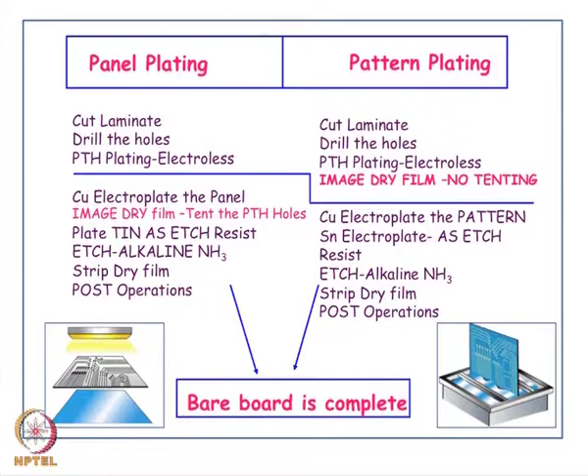There is a dielectric material, and then you have copper at the top and at the bottom. Now we are drilling a mechanical hole. These holes are meant for providing interconnects, electrical contact between the top copper and the bottom copper. When you drill a hole, the inside of the hole wall is dielectric material - it is non-conductive. So you have to make it conductive.

So the plated through hole process sequence will let you know how a conductive hole wall is established using a combination of electroless copper and electroplating copper. So we look at the sequence once again, and this is highlighted through videos.

Now if you look at the first step, as we discussed last time, it is the image transfer process. I let you watch the image transfer, because this is going to be a very important step, whether we are going to do pattern plating or panel plating for a double sided printed wiring board. You can see here the board has been laminated with the dry film photoresist material.

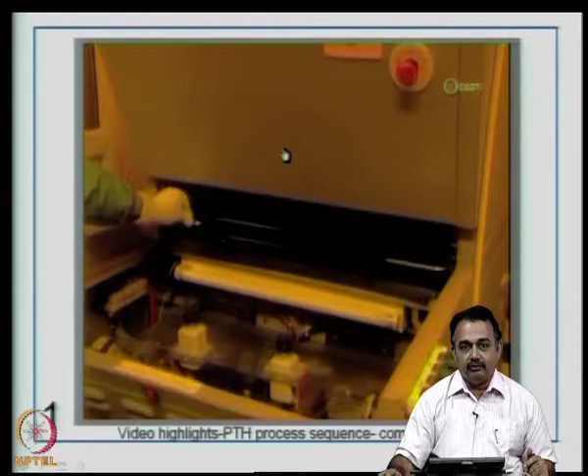Now remember all the properties that are required to be established before a dry film operation. The suitable masks for imaging the electrical layers are subsequently taken. They are aligned with the through holes that you have drilled, and then introduced into the UV exposure unit. You can see this is a UV exposure unit, where sufficient UV light is exposed to the dry film through the mask. Now this will help establish an image.

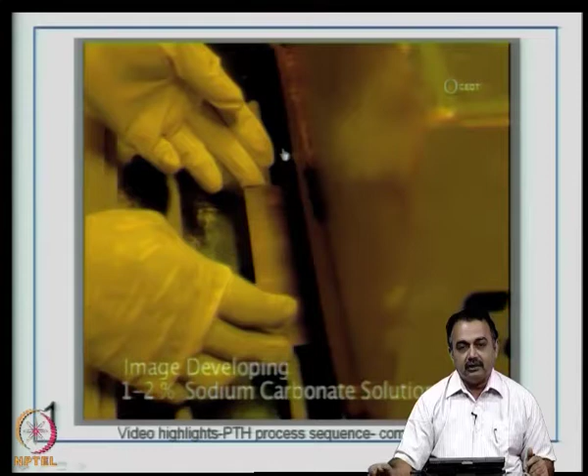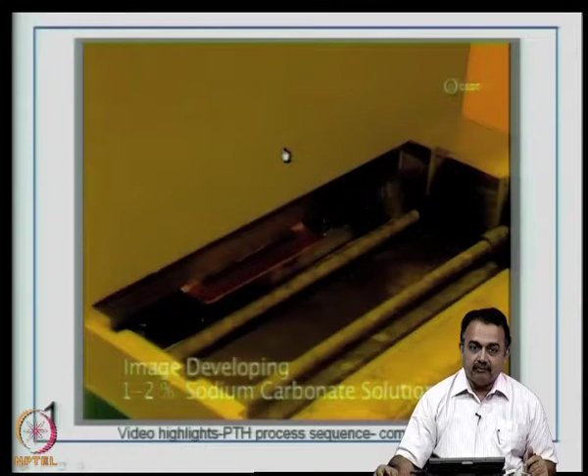Now this image is further stabilized by the developing process. So the resist will be removed in the unwanted areas, and the resist will remain on the substrate where the circuit is to be protected, or in some cases where the circuit pattern requires additional copper to be added in terms of increasing the thickness of copper on the circuit areas.

Now this is the first step, that is the image transfer. Now we get into the second step of the plated through hole sequence, which is called electroless copper plating. So once again I emphasize, we are not using an external DC current here. We are using a chemical reduction process from a copper rich solution and using some reducing agents to deposit copper onto the surface of the board as well as the through holes.

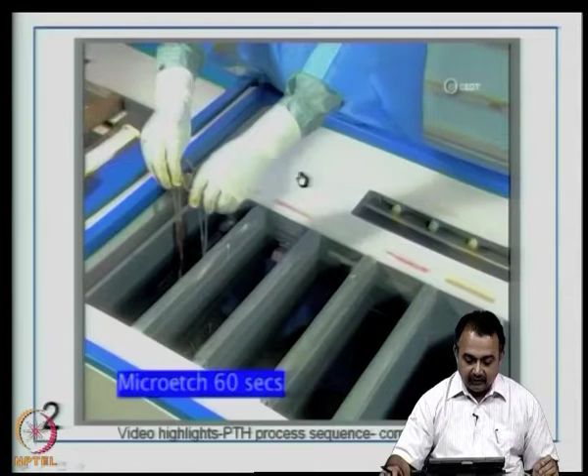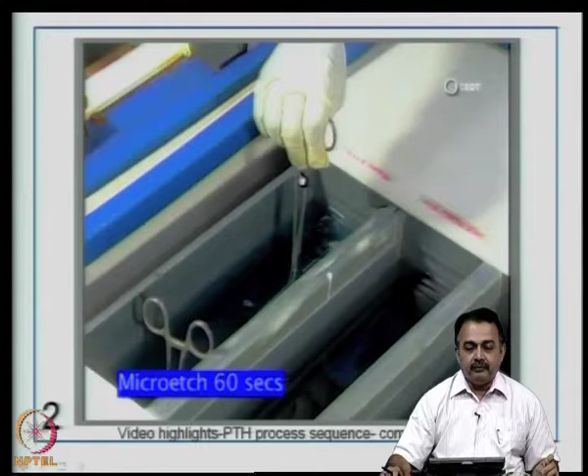Now before that, if you look at the video, what we are basically doing is a micro etch. This will remove some amount of copper from the surface of the board to the extent of about 1 to 2 microns. This will provide more roughness, more surface area for the imaging process to happen in a good manner.

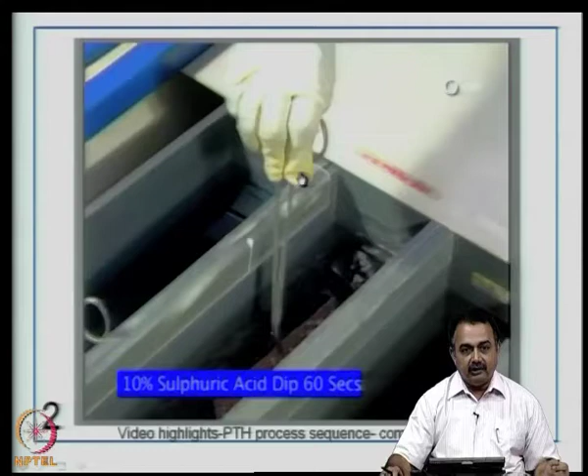Then the next step after the micro etch is a water rinse. Typically, you can use a cascade rinse or a spray rinse in some cases, as you have seen here, for 30 seconds. Then it undergoes an acid treatment in a 10% sulfuric acid dip to activate the surface with the acid. Then it is neutralized with water.

So these are all the cleaning processes. What you are seeing is basically a micro etch as a cleaning process, the sulfuric acid is a cleaning process to remove oxides and other debris that may be on the surface.

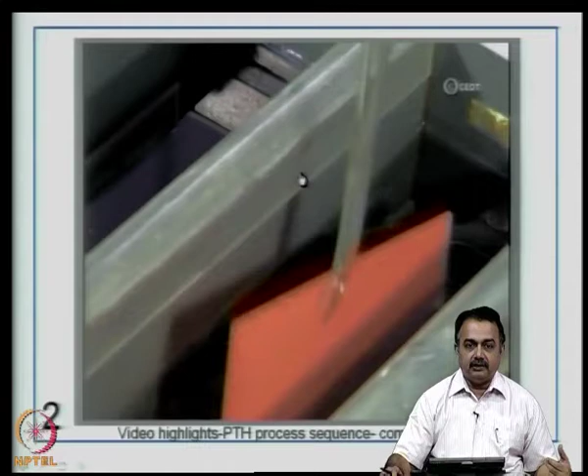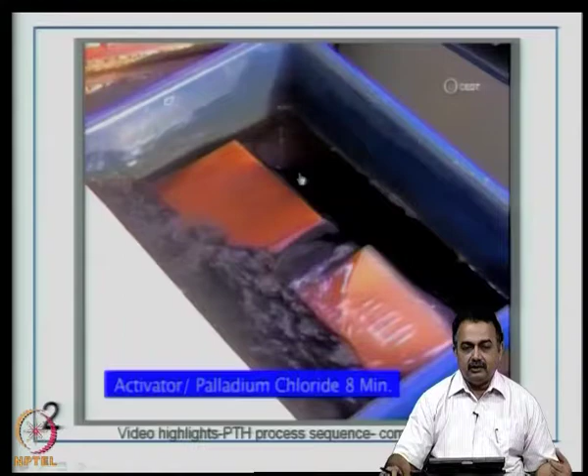Now we are introducing into a pre-dip. Remember, the next step is going to be a catalyst activator, which is chloride based. So we now wet the board with a chloride, hydrochloric acid. Now it is introduced into a tray containing palladium chloride, which is our catalyst.

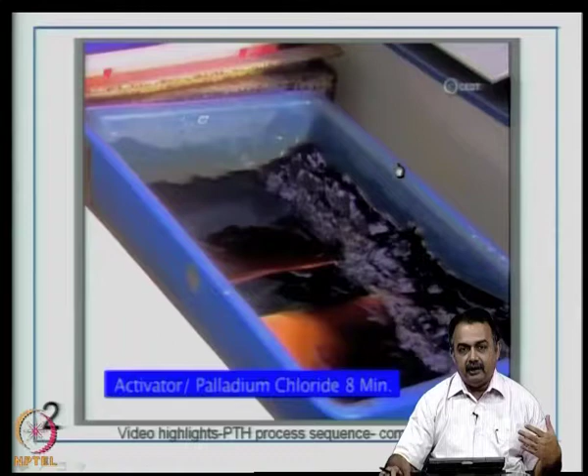You remember the equation that I put up in the last class, where we described how the palladium is adsorbed on the surface of the copper, and then to the surface of palladium your copper gets attached. It is a strong physical bond, and this again is very key to the reliability of the entire board.

Now after the recommended time in the catalyst, the board is washed well, water rinsed for about 30 seconds. Remember, the water we use here is deionized water, which is free from all contamination like chlorides, carbonates and so on.

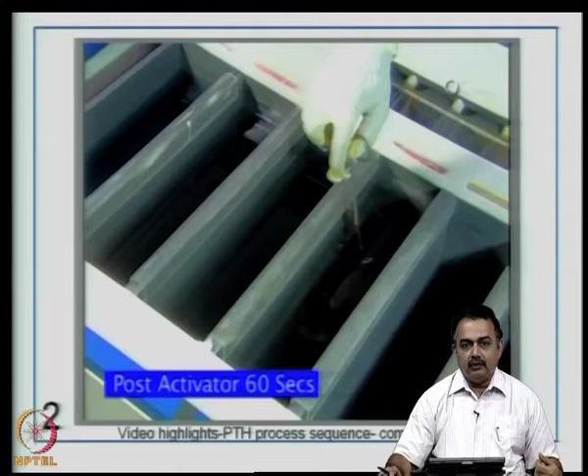It could be an 8-layer multi-layer board or a 16-layer multi-layer board. They have to undergo these critical process steps.

Now comes the water rinse after the post activator. Now, the board is ready for activation in the electroless copper bath.

If you recollect, this is the electroless copper bath, the blue solution, which basically contains a copper rich aqueous solution, and at the time of usage, the reducing agent like sodium hypophosphite or a hydrazine based reducing agent can be added. There are several reducing agents that can be used based on the recommendation of the manufacturer of the catalyst, because there has to be some compatibility.

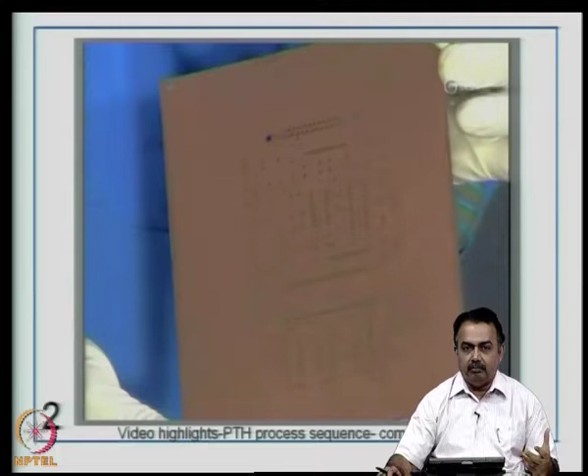Now, you can see that the board is plated with copper. This is real nascent copper. It can get oxidized, so the subsequent process has to be immediately carried out. Otherwise, you have to protect the copper with some kind of anti-tarnish solution or a coating.

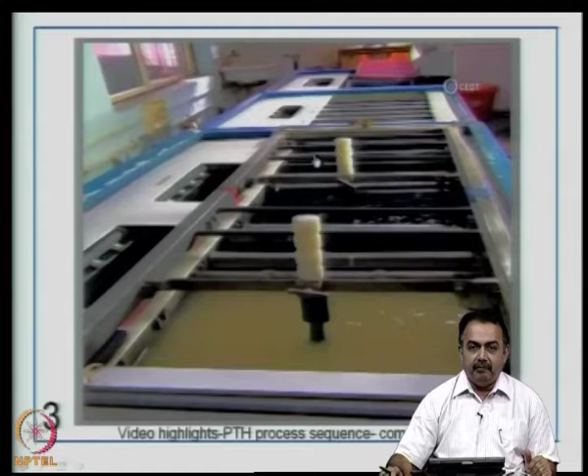Now, the next step in the PTH sequence is the panel plating process, which means the copper panel or the laminate, the entire panel gets plated, whereas in the pattern plating, as the name indicates, you will specifically open up those areas to receive plating.

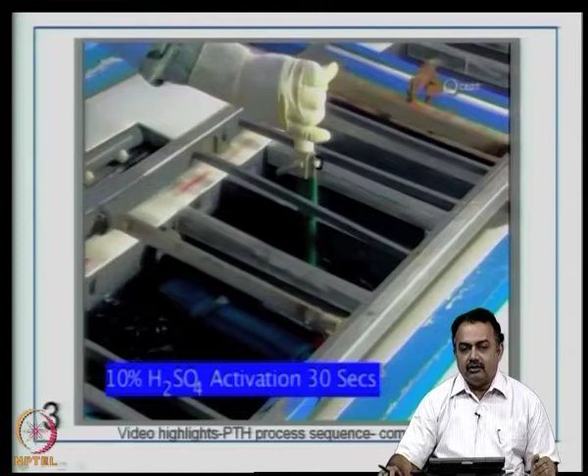Now, in the plating process, what you are seeing here is basically a jig is attached to the panel for easy handling, and for the copper plating bath, as you know, there is an electrolyte, there is an anode and the cathode. Your PCB acts as the cathode.

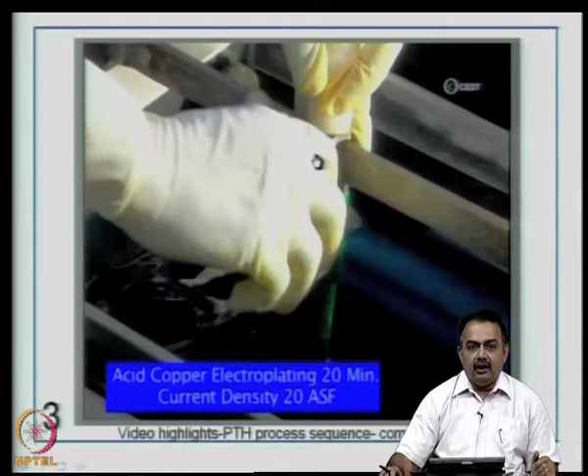Now, here you see that the technician is now introducing the jig containing the panel, the printed wiring board, which is the cathode, into the copper bath, copper plating bath, and then the current density of about 20 amperes per square feet is now activated for the plating bath.

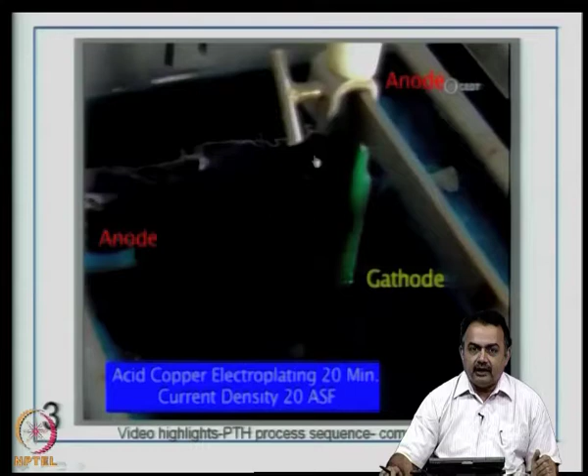So, you have two anodes on either side, here as well as here. You have the anodes in a bag, so that you get high purity anode getting into the electrolyte.

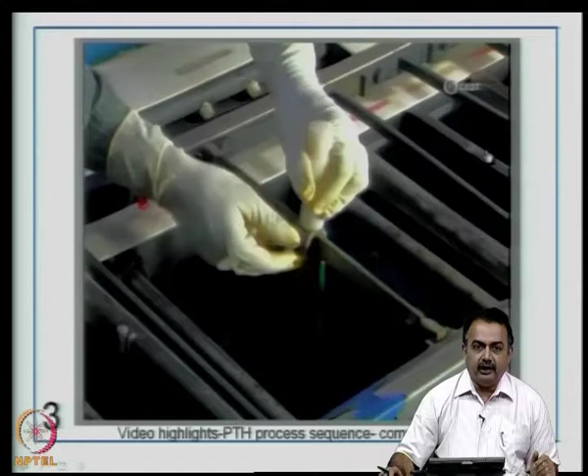Now, after sufficient time, here in copper plating, you have to calculate the area to be plated. There should be constant agitation, there should be good air circulation, and the distance between the anode and the cathode has to be measured, and accordingly you have to set the current density.

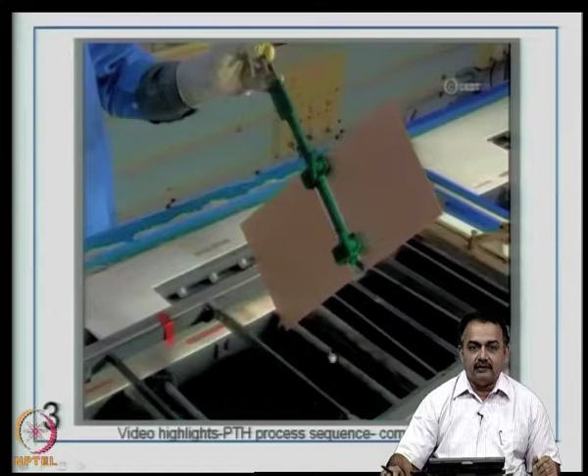Typical guideline is 20 amperes per square feet, and it depends on what thickness you want to plate. Your final thickness, if it is around 32 microns or 35 microns, accordingly based on that, you can see that this panel is very shiny, a good coverage of copper has taken place on the entire surface of the panel.

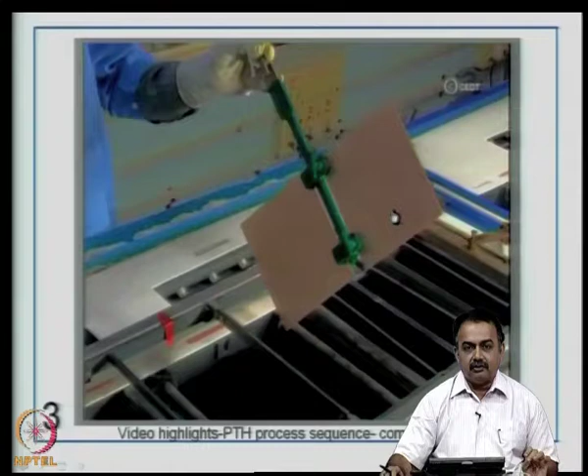And if you go deeply and carefully into the microscope at this stage to look into the through holes, they will be well plated. You can see from a side shot here that the holes are well plated with the pure copper.

Now, again this is going to be a key step. As the name indicates, in panel plating the entire board is plated. Now, you can do an image transfer on the printed wiring board and then remove the unwanted copper.

So, you are now going to protect the areas that you require and then leave out the other areas for etching. Now, we will go into pattern plating.

So, here the difference is that you will, after the electroless process, do image transfer onto the panel and then mask the areas that do not require additional copper plating. So, for this particular step,

you do an acid cleaning first, because the copper that is going to be plated on the circuit areas, the base area needs to be clean for good adhesion of electro copper.

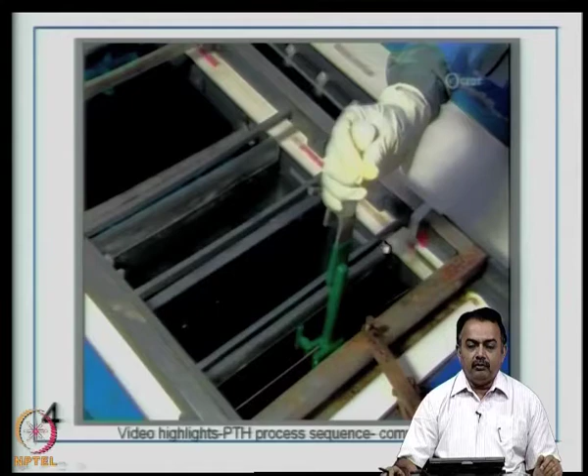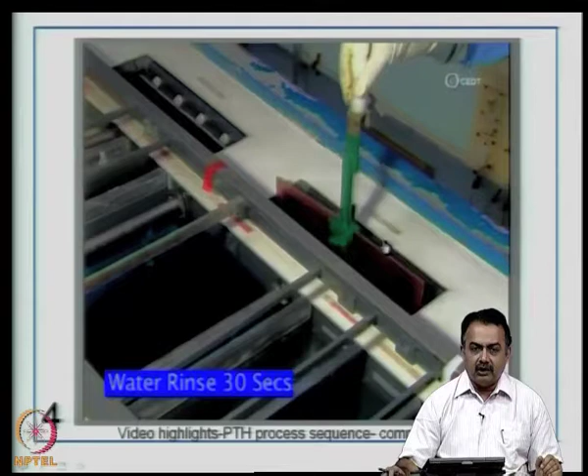During the plated through hole process sequence, you cannot ignore any step which includes a water rinse, acid cleaning, or a micro etch process, as indicated, because if you miss out or ignore one of the steps, you will contaminate one chemical into another tank, and that will cause lot of process variations, affecting the final yield.

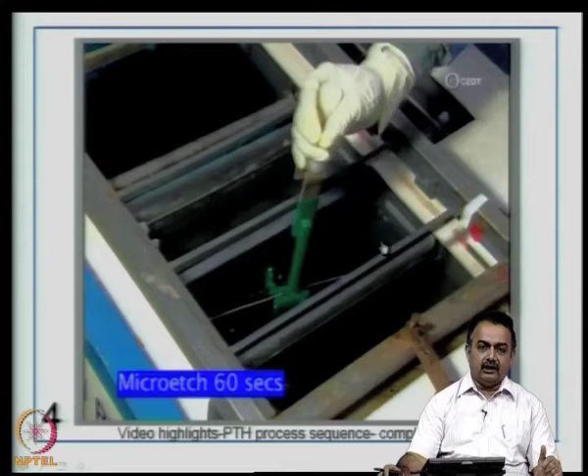You can see here that the exposed copper which is going to receive plating is micro etched for about 60 seconds using ammonium persulfate micro etchant. This is basically to improve the adhesion and make sure the electroplated copper adheres well to the pattern area. The dry film is going to protect the non-circuit areas from receiving copper.

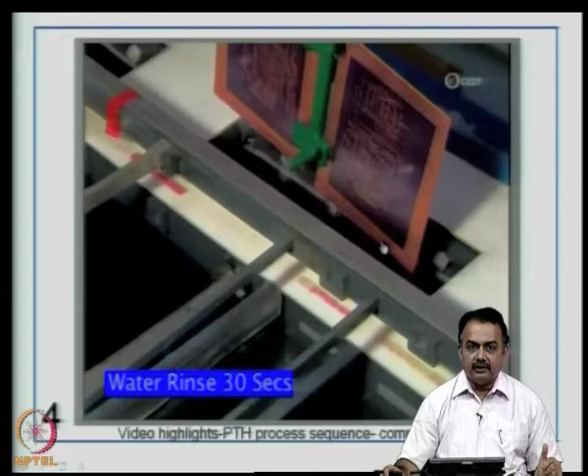Also, we can see in this particular shot that the panels have a bus bar around the sides, that is basically for the jigs to hold the panel and also to receive the current through the jig, so that plating or deposition can take place at a uniform rate.

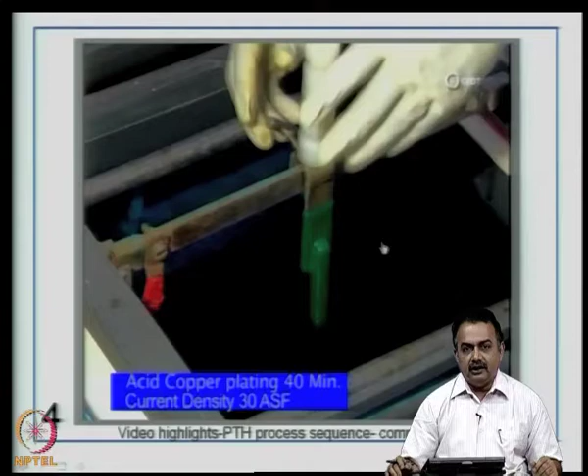Another aspect to see here is this electrolyte, the acid copper bath. Typical timings indicated are about 30 to 40 minutes at 30 amps per square feet, which will give about 20 microns deposited. Again, after every process there is a water rinse to avoid contamination.

This area given around the panel is basically for the jig to be held and to provide even plating.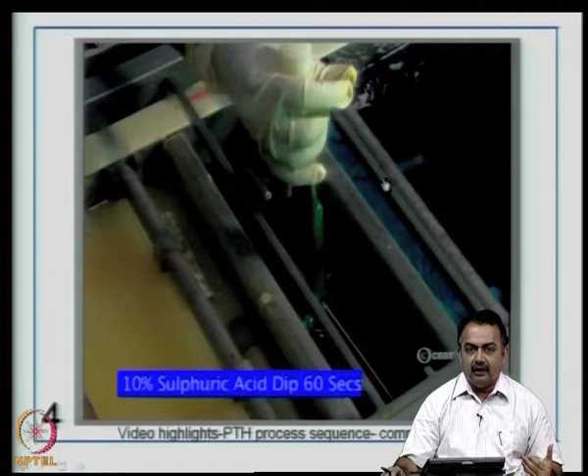You have to make sure that your electroplating bath provides even plating from end to end along the entire panel. If there is uneven plating, then you will have electrical issues finally, because it is not a complete translation of the electrical design.

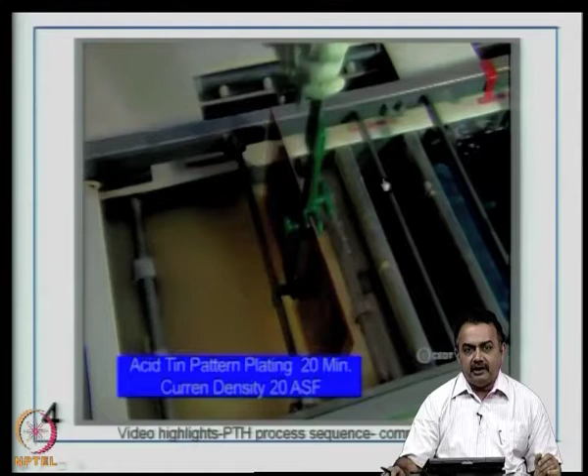Now there is a 10% sulfuric acid dip for about a minute or so, and then the copper that is plated exclusively on the pattern areas is further protected using acid tin pattern plating, using an acid tin plating bath containing a tin rich source, typically at a current density of about 20 amperes per square feet for about 20 minutes.

Here essentially we are immediately protecting the copper from atmospheric oxidation by tin plating. You can see that the entire pattern areas as well as the side bar areas are plated with tin.

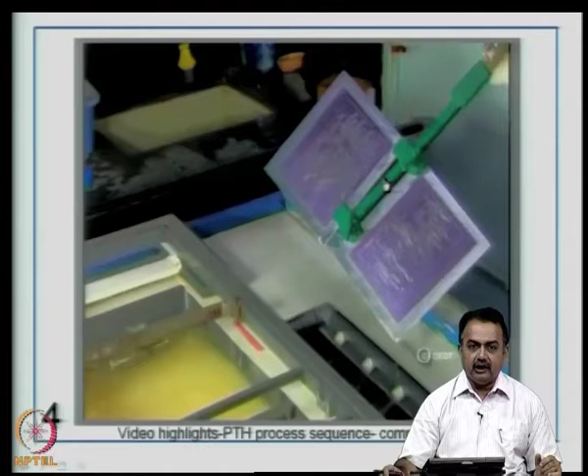Now the tin can act as an etch resist in this case. You can see there is a tin plated area, and in contrast the dry film area which has protected the non-circuit areas so far.

So you have now seen what is pattern plating and panel plating. Now we go into the final step of the PTH sequence, which is basically removing the dry film as well as performing the etching operation.

So the panels are introduced into alkaline sodium hydroxide caustic solution, typically about 5 to 10% hydroxide solution, and you can see the dry film is lifted off, stripped off the panel. What you see here are the pattern areas protected with tin, and the brown areas which are the copper, which will be removed by the next step, etching.

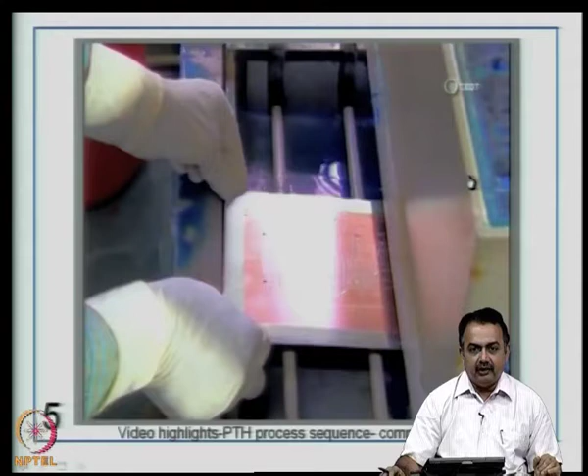So the next step is conveyorized alkaline etching using alkaline ammonia, which basically contains ammonium hydroxide, ammonium chloride and liquor ammonia, in addition to copper as a catalyst to start with. You can see spray nozzles from top and bottom going through a conveyorized machine, and a water rinse at the end of the line.

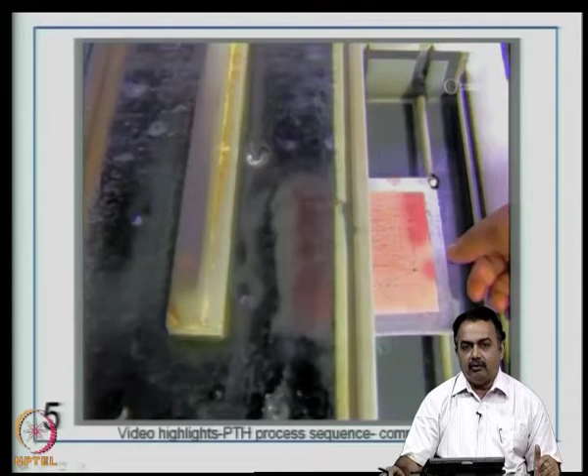In some cases, as in this example, after the first pass the board is not completely etched. You have to set the right temperature, with complete control of the elements in the alkaline etching bath, and now the board is reintroduced into the conveyorized etching machine to further remove the existing copper.

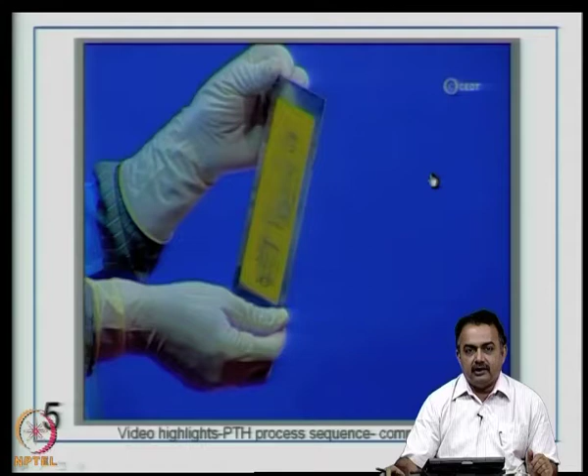In some cases, if it is a long line with a large voluminous tank, you can probably complete the etching process in one pass, but being a prototype, this is now happening in the second pass, and you can see the board is completely etched out, showing the base laminate and the copper pattern areas which are intact.

So, have a microscopic examination at this particular point to see if the etching process has been completed thoroughly without any undercut. That is a very crucial quality examination that one needs to do.

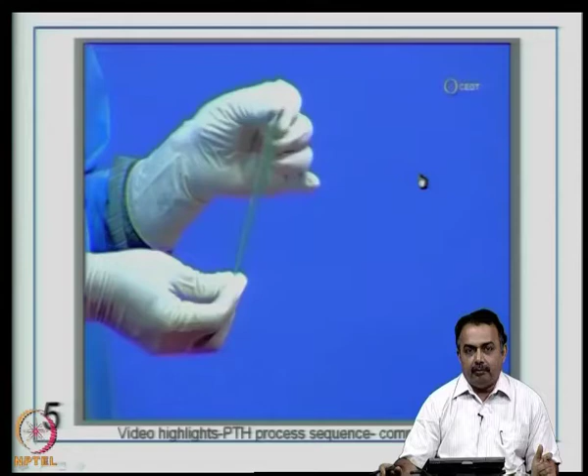So this completes basically the plated through hole process sequence for doing a double sided electrical interconnection. Now, you can repeat these steps for a multi-layer board, but at the same time you have to look at final measured thickness. Therefore, you will use thin laminates for inner layers.

Now, what are the post operations that one does after the board is completed? Quality inspection is a must at all stages. I would mark this as very important, because in volume manufacturing you have to inspect the board at every process step.

Then solder masking, legend printing using white inks, scoring and routing, because in some cases the panels may have a large number of boards. So you have to isolate these boards, and then in some cases in the individual boards you may have to perform some kind of a routing or opening a slot, that is basically for introducing an electromechanical device or a chassis part of it into the board.

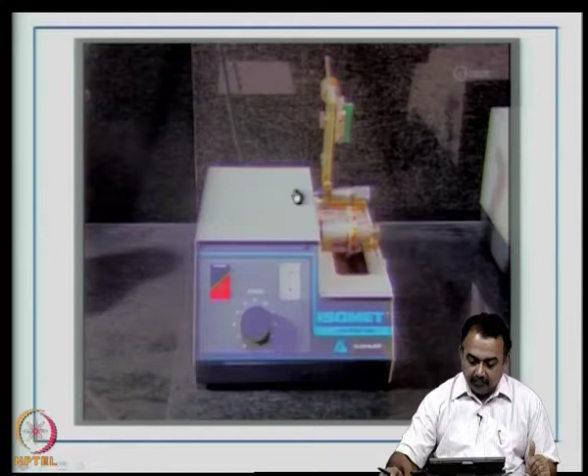Now, basically we will prepare some test coupons using some epoxy material, and then we will zero in on the site where the sample needs to be measured, and then microscopically look at whether there are cracks, whether there is a delamination from the base substrate, and the nature of deposit, whether it is porous or hard, and whether it is having the required thickness.

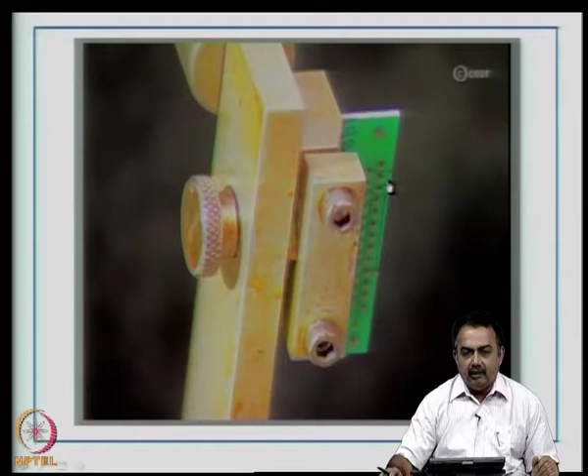You see in this particular instrument, which is basically a sawing machine, the PCB, a small sample which contains the through holes has been clamped, and then you can see here that there is a saw, typically a diamond saw, that is activated, and there is a liquid here, typically water, to remove the heat while the sawing cutting process is on.

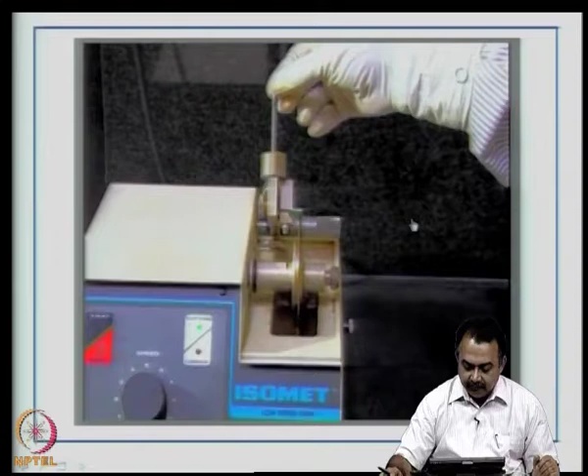The board is introduced to the saw. Now, cutting takes place at slow speed because you do not want to damage the sample, and the cutting is now taking place typically right near the through hole. So you do not want to damage the through hole, you are going to cut this very close to the through hole, and then using polishing methods you are going to approach the site.

Here you can see that the technician is introducing the PCB which contains the through holes into a template.

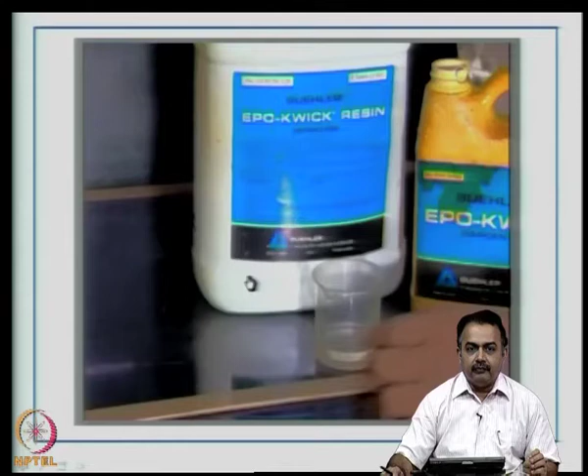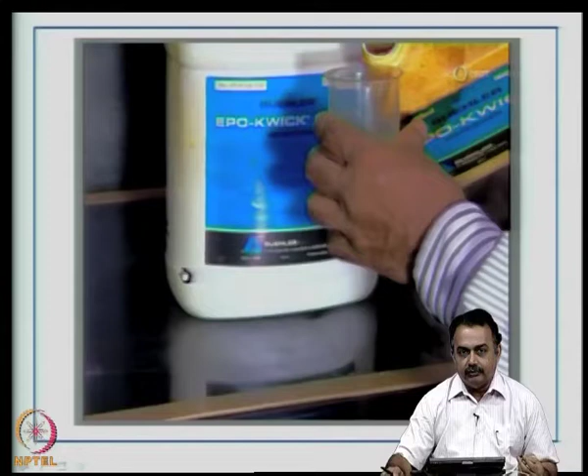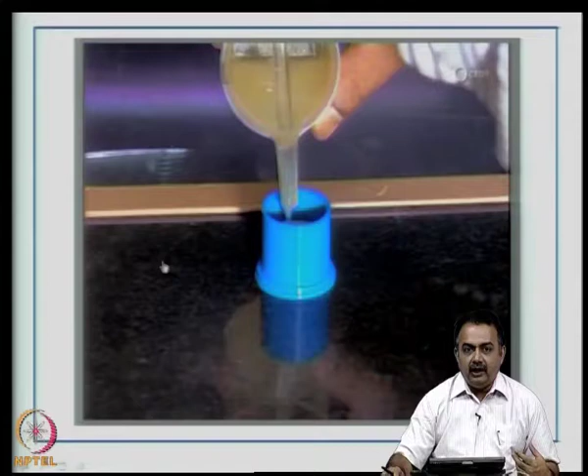Now, you can see here this is a template which is now introduced into a container, and here you can see we are now mixing an epoxy material, and on the right you will see a hardener is being used. So, based on the recommendations of the manufacturer, epoxy and its suitable hardener is mixed thoroughly without air bubbles and slowly introduced into the plastic container which contains the printed circuit board coupon.

Now, here you have to make sure that you do this process very slowly. Lot of heat will be generated. This is an exothermic reaction, and you have to introduce the epoxy material slowly into the container to make sure that there are no air bubbles. So, typically you can keep the epoxy material to stabilize enough after it is mixed for about 10 to 15 minutes and then introduce into the container.

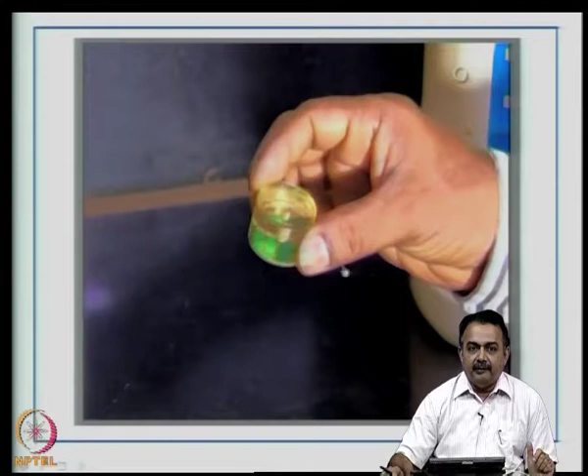Now, this is a quick set polymeric material. It will set quickly in about an hour. Now, you can see here that the coupon has been completely set. You can now release it from the container. Now, this sample which is there embedded in this epoxy, you can see here that the PCB is now embedded into the epoxy coupon. This is called a potting process using an epoxy, or you can say this is a cross section sample.

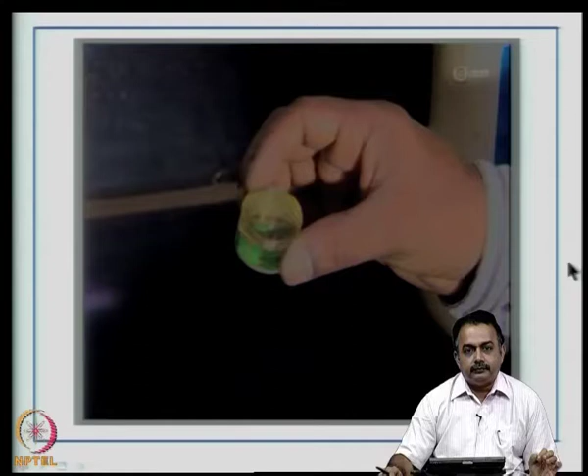We are now at the intermediate stage of looking at the site where we want to measure the copper thickness. Now, after this process is over, we now have to polish the sample to get close to the area. We are looking at a few micron thickness. Therefore, the polishing process from that raw coupon has to be very slow.

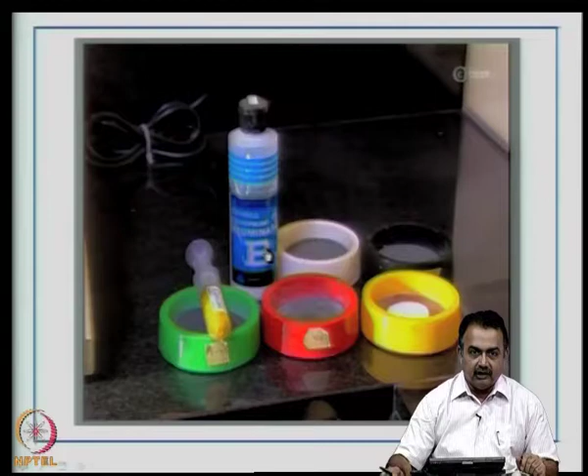So, here you can see there are various materials used, typically emery paper of various grades that we normally use for polishing, but here we have to go from coarse to less coarser and more fine emery paper material, and you can also use some kind of a slurry alumina silica gel, for example, to aid you in the polishing process.

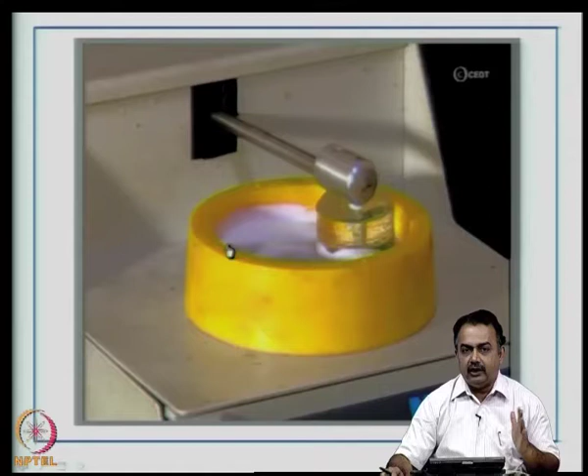So, this container which contains the paper, emery paper, also holds the sample that we have just prepared, and then using some kind of a slurry, typically water, and you can see here alumina silica gel is now introduced and then continuously polished at very slow rates or at high rates initially, and then slowing down the rate of polishing. Here you can see the surface of the coupon as was done after the coupon was released from the plastic container. Now, after polishing, you will slowly approach the...

PTH area. You can see here very carefully the two plated through holes and the copper very clearly visible to the naked eye, and you can now introduce it into the various microscopes that you might have and also measure the dia as well as the thickness.

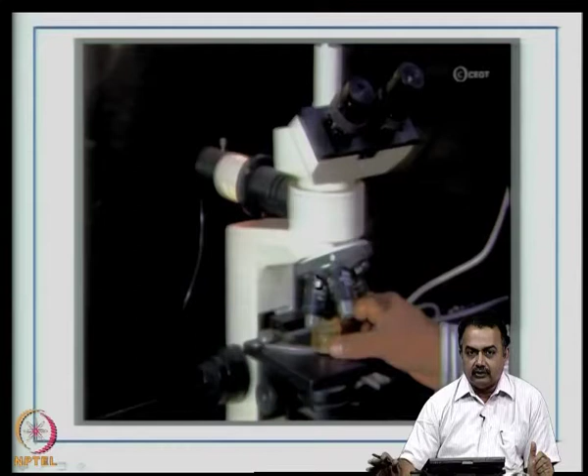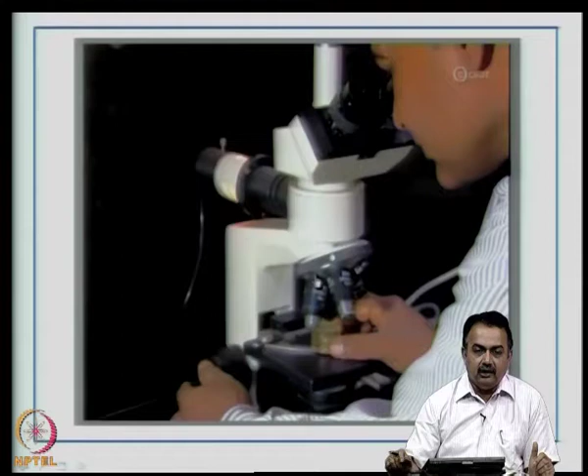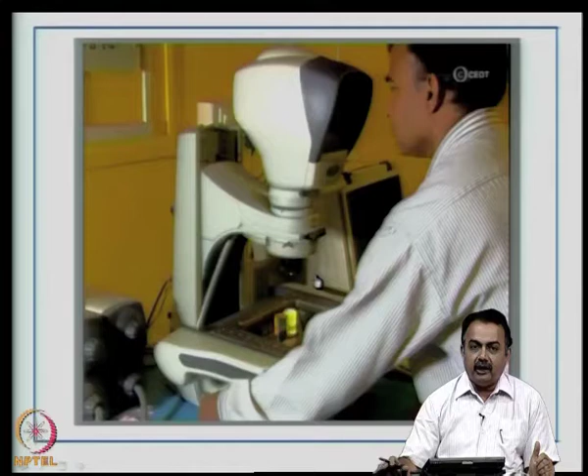So, typically this is an important and a must process in the volume manufacturing also. So, when the drilling process starts for certain panels, they will drill these coupons of various drill sizes, and then the quality team will have to do samples for each of these coupons or earmarked areas, and then they have to report back to the manufacturing line about the quality of the deposit and how much tighter control they have in the deposition rate, because here the electrical performance is going to depend on the thickness of the copper deposit that the manufacturer can provide you, because you can't plate too much thickness of copper more than necessary, and also you can't have lesser thickness other than the specified.

These videos have given you highlights about the stricter quality control that establishes in today's manufacturing process, which the designer should be aware of.

Now, we look at the post process, for example, solder masking on bare copper. It is called SMOBC. Now, you have protected copper with tin, but tin is not a good base for applying solder mask. It can peel off because the surface of tin is very smooth. It does not provide good adhesion. So, typically some people opt for applying solder mask directly onto the bare copper after treating the copper sufficient enough to hold the solder mask.

So, what are the steps for SMOBC? Plug all the through holes by either tenting using a dry film process or ink printing using a stencil or a screen printing process. Chemically strip off the tin metal until the copper is exposed. So, this has to be a carefully done removal process, otherwise you will remove the copper also.

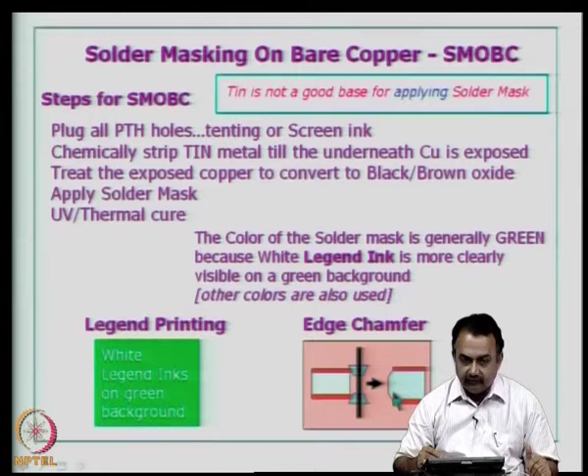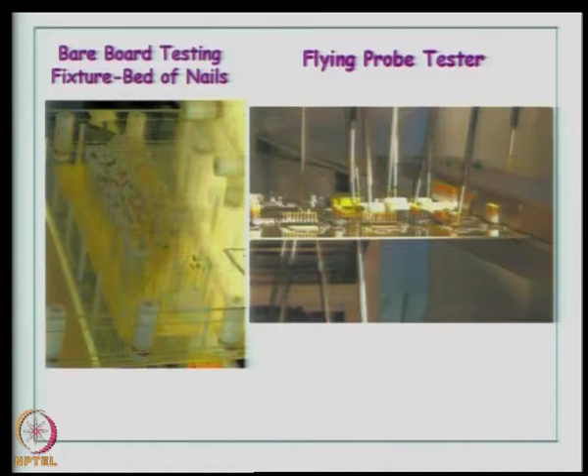I talked about bare board testing. On the left, you see here a bed of nails, used by all manufacturers as a compulsory test for qualifying every single board. What does this mean? There is a circuit pattern for your board dictated by your net list. So, based on the nets, they will produce a bed of nails. You can see the long protrusions - these are stainless steel pins or nails that typically depict your circuit pattern. This is done on some kind of plastic mold, typically polycarbonate, and then your board will come and sit on this bed of nails, and based on the through-hole coordinates, they will perfectly snug fit into the bed of nails.

You will now look at parameters like shorts or opens on your test board by applying a small voltage. You will now activate the board to get information about which nodes or which part of the nets are open or shorting. So, you can mark those areas, and if this is a consistent or persistent defect, then there is some process defect which can be identified, and the information can be passed on to the particular section in manufacturing for identifying the defect and rectifying it. Otherwise some kind of repair can be done if you have very small defects - for example, it could be a lift off, or some kind of broken line due to improper handling during the manufacturing process and so on.

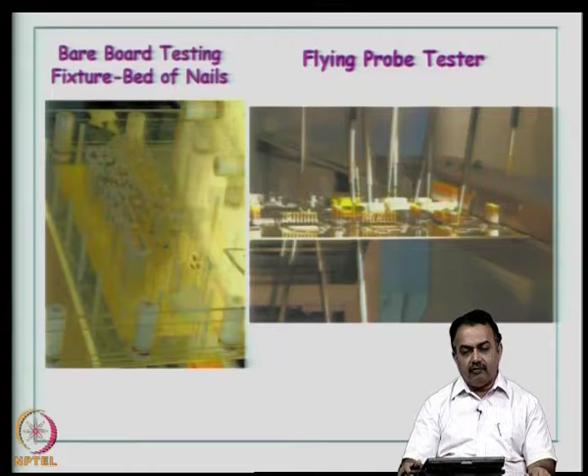You can do it simultaneously at both sides of the board, as you can see here, using different probe points simultaneously to check a particular net and see the failure at different places. So these are equipments that are used - one on the left at the manufacturing site of the PCB, and on the right in the assembly segment.

Now, in general, board finishes will be either a solder finish, so you can expect electroplating of tin to take place, because tin-lead and lead is not recommended to be used today. We expect that solder finish using electroplated tin is an accepted process, or you can have a finish with gold.

I mentioned earlier, when you plate gold, you have to plate an undercoat of nickel and then have gold plated on the nickel to prevent gold diffusion into copper. So today, electroless nickel gold is a popular process in many countries, and the thickness is well controlled by electroless nickel gold. So the board is now ready for assembly at this point of time.

Now we will look into some aspects about multi-layer boards. We have seen so far double sided boards. Multi-layer boards, laminated multi-layer structures, are made by stacking separately made layers and pressing them into a mono block in a multi-layer press. So you can have a double sided board and another double sided board. You can introduce them into a multi-layer press, separate them by a dielectric material called a pre-preg, as you are aware, and then they are pressed in a multi-layer press to get a 4-layer structure and to the required thickness.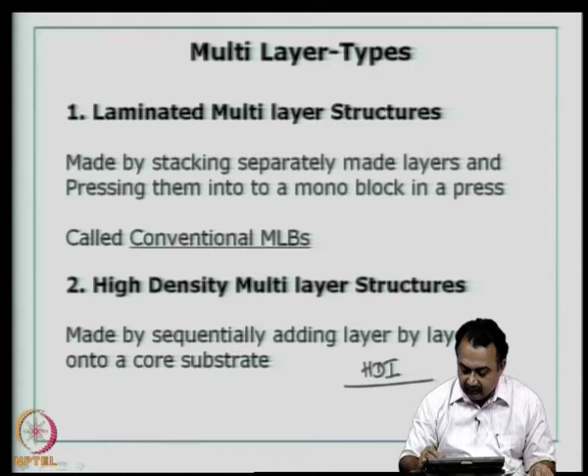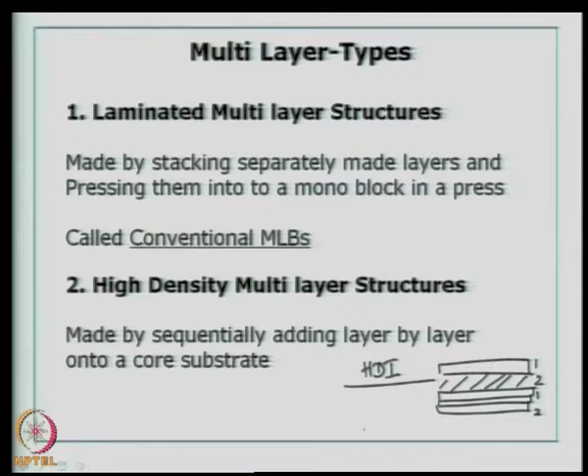You are aware of the term high density interconnect structure, where we are typically talking about an existing core layer. It can be a 2-layer board, and then you add one layer at the top, and maybe another layer at the top, then have a dielectric and another copper layer here. So you can have 5 layers built by sequentially adding copper and dielectric material.

So the construction of laminated multilayer structures, the key raw materials are: you should have thin core laminates, typical dimensions could be from 0.5 mm to 1.5 mm; pre-preg material 0.5 mm or even downwards, 200 microns, 0.2 mm to 1.4 mm. These are all based on the kind of final dimensions that you require as per your design.

Treated copper foil, because as you build the multilayer structures, you are introducing copper foils in some cases, or you can also add copper by plating. Typical thicknesses are from 10 to 35 microns, and again these are dependent on the electrical design specifications.

The manufacturing options will be, first, copper foils will be bonded with a pre-preg material. So this is the conductor and here you have the insulator. These will be introduced into the multilayer press along with the core, and then layers can be increased. The second point is using rigid laminates bonded with a pre-preg material.

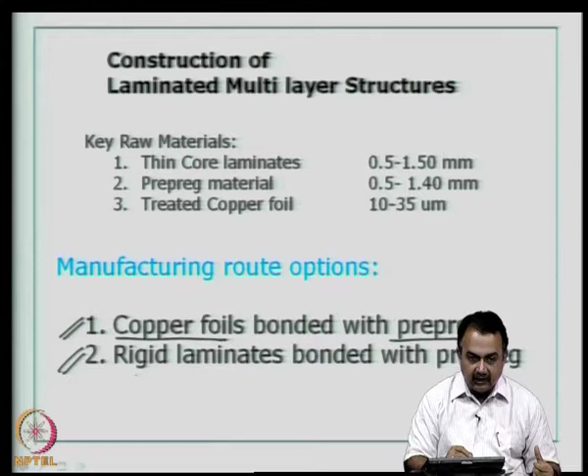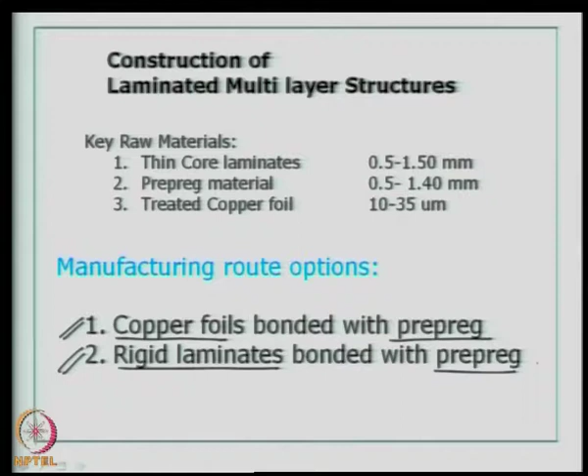Okay, so we are going to see both of these options. In this second case, rigid laminates, let us say a 4-layer board is now introduced with 2 pre-preg layers, one on top and at the bottom, and then you can have copper foil on both sides to get a 6-layer board. Let us look at a case study or an example for a 4-layer multi-layer board construction.

Option 1: the first thing here is stack bonding 2 double-sided boards using a pre-preg material. Now assume that you have done this part. This is a double-sided board; you can see here there is copper, you can see here there is copper, and this is a two-sided printed wiring board. Similarly, here this is a two-sided printed wiring board, which you have done as per the process that we have just described. Okay, this is the copper, here you have the copper.

Now the design has been done in such a way that if you introduce these two layer boards together using a set of pre-preg materials, here in this particular example I have shown you there are two pre-preg sheets. The thickness can be varying from 200 microns to let us say 500 microns for each of these. Introduce them and then stack them together and send it to a multi-layer press.

Now the boards, the epoxy will melt and then they will nicely sandwich between the two double sided boards. Later, you can introduce a through hole from the top to the bottom to interconnect layer 1 to layer 4.

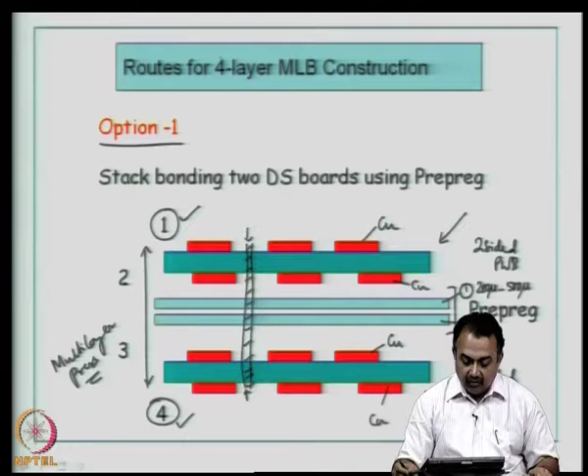The second option is that you can do a stack bonding of a double sided board and adding copper foil for the final two layers. So in the first case all your imaging is complete, and here we are talking about a double sided board with copper and the dielectric material. Imaging is complete. Now we are introducing the pre-preg material here, and then this is the copper foil, again another copper foil. It is now sent to a multi-layer press.

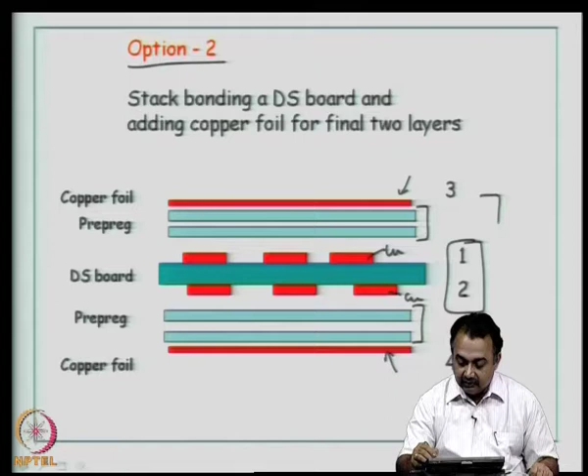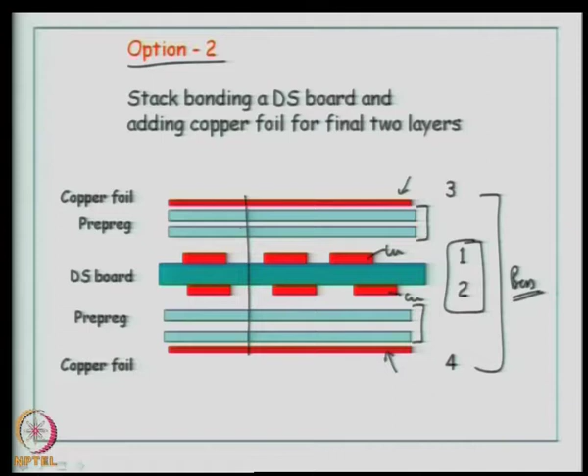So at the required or specified temperature and pressures, there is good bonding. Now you can again introduce a through hole. You can do imaging here, image your copper areas at the top and the bottom, and then establish connection between layer 3 and 4 in this case as notified.

So here again you will do a dry film process, you can do a pattern plating if you require. It depends on what kind of copper foil thickness you are taking, typically it will be very thin. Then you can add enough copper to create your required copper thickness top and bottom. You can also establish connection between layer 1 to the inner layer of copper. Here again you can do that and you can make it conductive. This whole wall can also be made conductive.

So this is a through hole. This is typically a blind via. This is again a blind via, and here you may probably have through holes which will now become a buried via. So these are the various schemes.

So in a nutshell, what are the major steps in creating a 4-layer board? Process a double sided board, let us say 0.8 mm core. Your starting double sided board will be 0.8 mm. Now you lay a 0.4 mm thick pre-preg on either side, so it is almost 1.6 mm thickness now. Then you add 35 microns of copper on top of the pre-preg on either side, so that completes the copper construction.

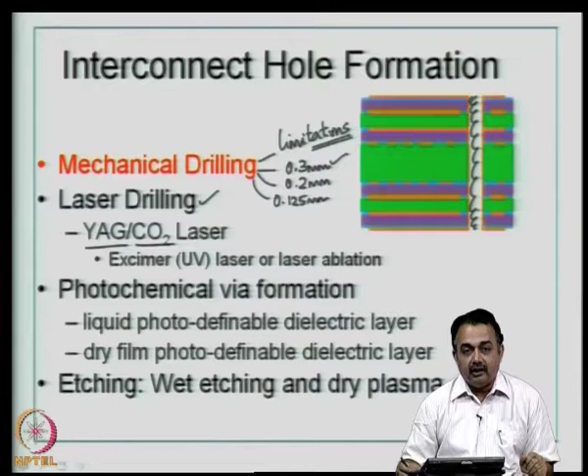Because if you drill a hole wall which has got a lot of debris and defects, it is going to be reflected in your electroless copper plating. Therefore, one has to be careful about what kind of methodology you are going to use. But laser drilling equipments are becoming very common, they are affordable, and they have indicated that you are going to get a very high throughput and yield in terms of number of PCBs produced using these laser drilling machines.

The other step is using a photochemical via, where we use a liquid photo definable dielectric layer, and you use photolithography to open up the via from this very thin dielectric layer material. It can be either a liquid or a dry film, but the dry film photo definable dielectric layer is not available in abundance, so most people tend to use liquid dielectric layer material to produce photo definable micro vias.

When you use these kinds of methods other than mechanical drilling, we are talking about producing micro vias, not the vias that we normally use for component mounting, which is plated with copper. Micro vias by definition are typically those vias which have dimensions of 150 microns and less. Today it is redefined as 125 microns and less.

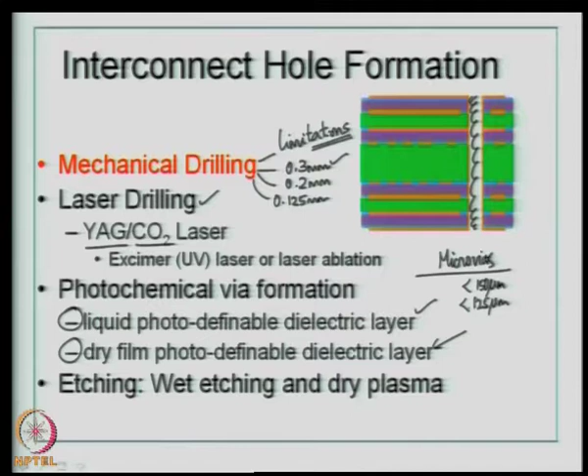The methodology for micro vias can either be laser drilling or photochemical via formation. There is another method called wet etching, but it does not produce the kind of results that we expect for these kinds of high density interconnect structures.

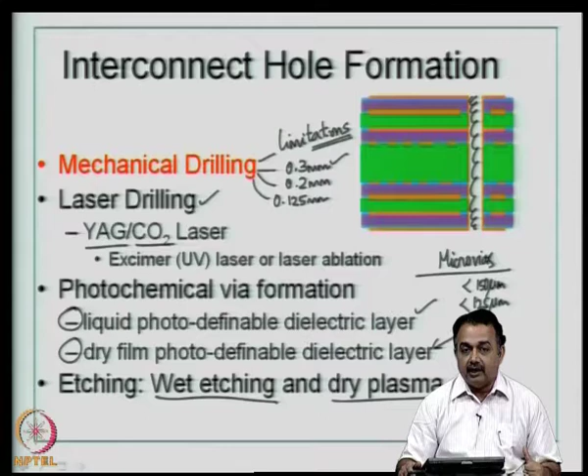Plasma, using a dry plasma etch, has been tried in prototyping. It produces better results in terms of the hole wall definition and the kind of undercut. When you talk about etching, there is always a problem with undercut, and wet etching produces high undercut compared to a dry plasma etch, but it is a very slow process.

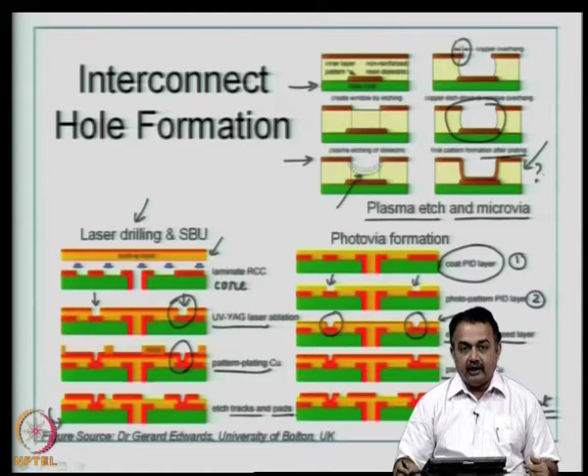So the summary here is the interconnect hole formation for high density interconnects can be done by mechanical drilling in one case, but for vias which have a smaller diameter, people are going in for laser drilling process, plasma etch, and photovia formation. As I said before, mechanical drilling to the extent of 125 microns is currently available, although expensive, and these are the 4 major methods to create a microvia.

The basic reason is that mechanical drilling has its own limitations, because the minimum hole diameter you can create is 0.15, registration is a problem, and debris and smear generation during drilling can block the holes. You need proper hole wall preparation before electroless plating.

The economical aspects - it has got low yield because you are going to depend on sequential drilling process and it can take time.

Whereas processes like laser drilling and photovia formation, especially, are parallel processes. Although laser drilling is a sequential process, photovia formation can be very economical and it can increase the yield because it is a parallel process.

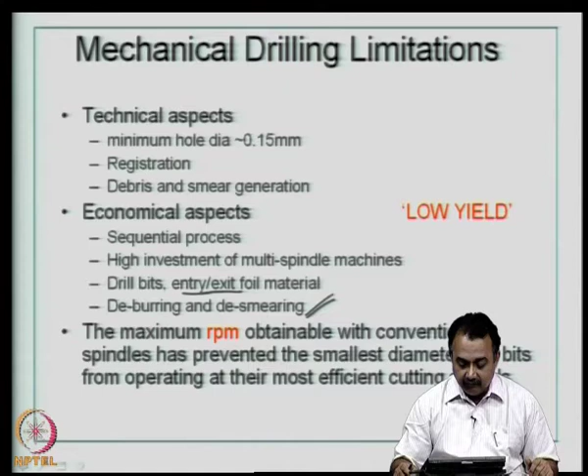High investment is required for multi-spindle drilling machines. Drill bits are expensive. You have to use entry and exit foils. Deburring and desmearing is a very important operation to remove debris and prepare the hole wall conducive for electroless plating. And the maximum RPM obtainable with conventional spindles has prevented the smallest diameter drill bits from operating at their most efficient cutting speeds, which results in breakage of drill bits and so on.

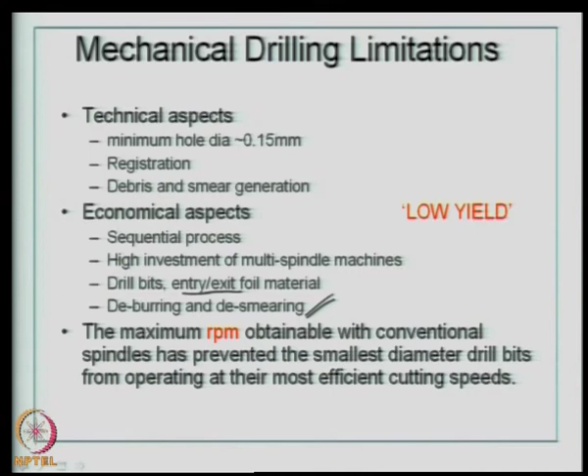So we will now look in the next class at a comparison of all of these various methods to create microvias, and look at how actually you build high density interconnect structures from a given core substrate.